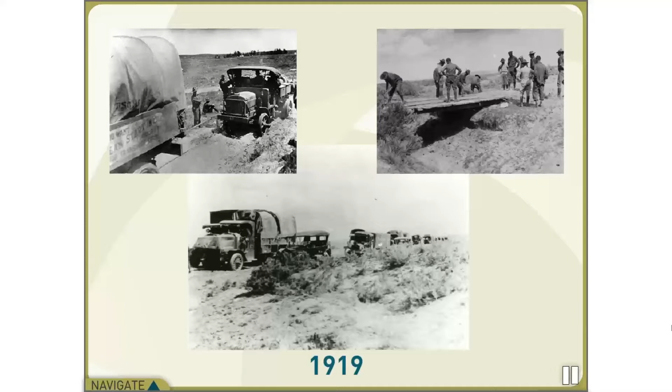It was July 7th, 1919, and a convoy of U.S. Army trucks set out from Washington, D.C. en route to Oakland, California. Their journey was arduous, to say the least. There were 230 stops due to difficult roads, accidents, and mishaps. The roads were at times non-existent, with practically all roads unpaved from Illinois to Nevada. Along the way, the convoy broke and then repaired 88 wooden bridges. Altogether, the convoy logged 3,250 miles with an average speed of 5.6 miles per hour. It was a tough journey.

One of the members of the convoy was a young officer by the name of Dwight D. Eisenhower. It was quite simply an experience he would never forget. And later, as President of the United States, he would call for the creation of a national interstate highway system. Initial construction was authorized in 1956, and the original sections were completed 35 years later.

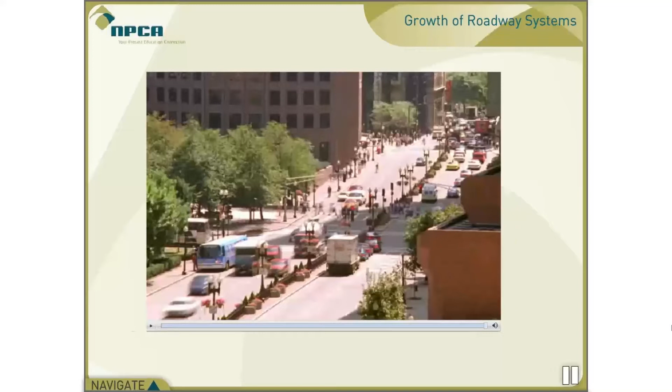At the same time, in Canada, the construction of the Trans-Canada Highway was underway, linking together for the first time all 10 provinces. In the decades that followed, the roadway systems in North America continued to grow, linking together communities far and wide. The impact of these roadways has been enormous, reducing accidents and saving lives, serving as the foundation for economic growth as goods and services are readily transported to their intended markets, improving productivity, increasing international competitiveness, bolstering national security, and enhancing quality of life.

Yet, there is a dilemma. In many cases, these roadways are aging, and the need for ongoing repair and maintenance is outpacing the funding required. In the United States, the Federal Highway Administration estimates that nearly a quarter of the nation's 600,000 bridges are structurally deficient or functionally obsolete. And repairs, when they are made, are often disruptive, slowing the shipment of goods and causing inconvenience for communities and travelers.

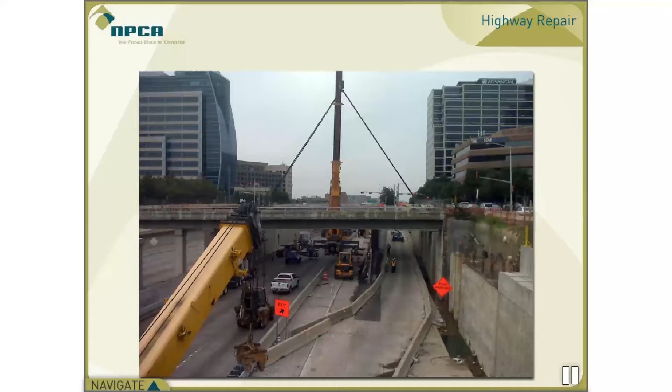These delays have real costs. According to the shipper UPS, if each of its 95,000 vehicles is delayed an average of 5 minutes a day over the course of a year, it costs the company $103 million in added fuel costs, wages, and lost productivity. Clearly, there's a need for new solutions to help keep roadways operational and productive.

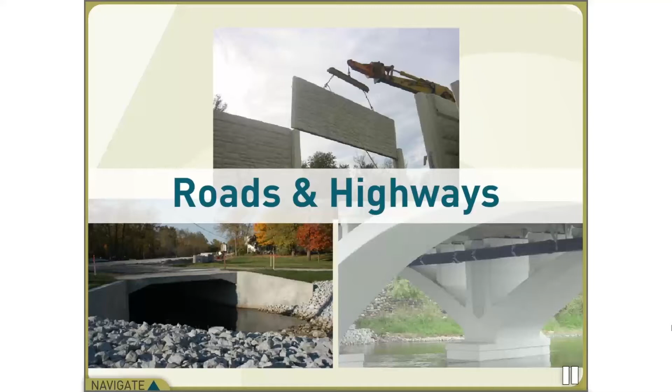Today, precast concrete products are helping provide solutions for roadway projects across North America, as well as a wide range of other transportation-related applications, such as products for pedestrian walkways and bridges, for aviation, for rail, and docks, platforms, and seawalls, and underground applications. And there are a number of reasons that precast products are chosen.

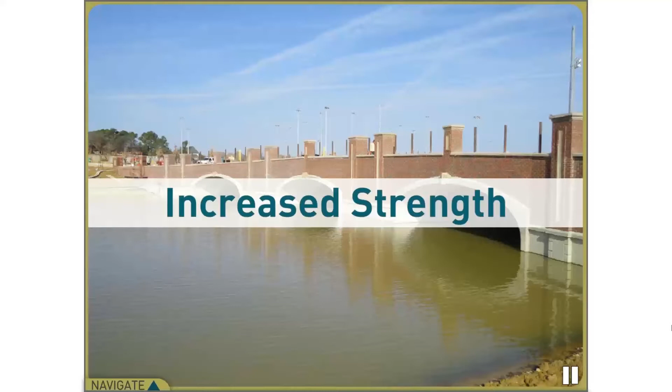Easy installation. Precast products arrive at the job site ready to install, often saving weeks over traditional cast-in-place construction. Increased strength: the strength of precast concrete increases over time. And less ongoing maintenance, often providing service life in excess of 100 years.

A wide range of products are used in road and highway construction. Let's take a look at some of the precast concrete solutions currently in use for roadway construction and maintenance.

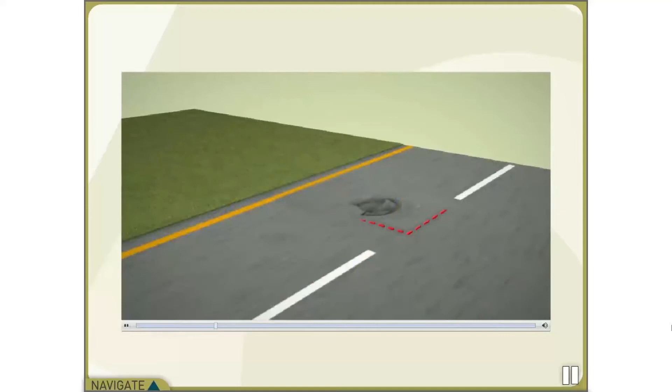Precast concrete pavement slabs can be used on highways, intersections, exit ramps, and airport pavement replacement for long-lasting, speedy surface repair or new construction. Precast concrete pavement slabs are prefabricated off-site in factory-controlled conditions and delivered to the job site fully cured and ready to be installed for immediate use.

Initially, it was difficult to go in and talk to these DOTs and say, we really need to do something about this. How we did it was we found a project that had a rapid set concrete, some type of quick setting concrete specified. And we went in and said, you know what we can do? We can do this in precast concrete. So instead of a 5-year life cycle, 7-year life cycle, we're going to give you a 40-year life cycle on your repair. And that got the attention of the DOT.

And they initially said, well, we'll try a single project and just see how it goes. And it went so well that it led to another project and another project and another project. And they're finding new uses for it now.

Precast concrete pavement has a huge potential for speeding up and reducing the risk of overnight construction and getting the freeway returned to the public without them even knowing that anything happened, except all of a sudden now the roadway is easier to drive on, and it stays that way for years.

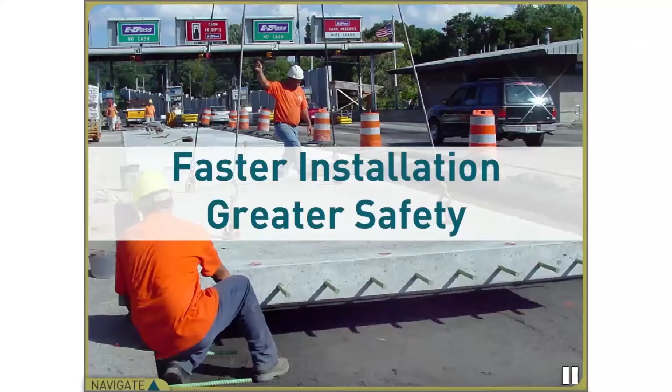Using a fully cured concrete system results in greatly accelerated construction scheduling and sequencing, reducing risk to road workers and the traveling public, all without jeopardizing the surface quality, durability, and long-term performance of the roadway. The speed and efficiency of a jointed precast pavement system is actually the primary driver in the way that we've used that.

We like to close the road for as short amount of time as possible and get it open to traffic. We want to do all of our work off peak. Precast pavement systems is really the only way that we're able to stay within the kinds of windows that we want to have and still expect some durability for the repair. So that's been the primary reason that we've done that. Precast concrete pavement systems provide long-term solutions due to precast concrete's ability to withstand heavy traffic flow over many years.

Our very first project was a pour-in-place project that we converted to precast. So we had the big orange cones along the freeway for several months, but it happened in the middle of the night. We actually had people calling our DOT and complaining because there was no work being done and all the traffic control was set up. So the DOT had to explain that, no, it's happening in the middle of the night.

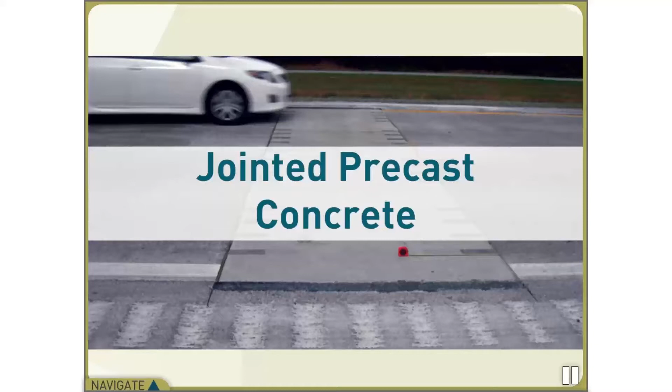Jointed precast concrete pavement is made up of individual slabs that are 16 feet or less. The vast majority of concrete pavement in existence today is jointed. Jointed precast slabs installed in an existing jointed concrete pavement structure retain the expansion and contraction characteristics of the surrounding existing pavement, making it the logical choice of repair for existing jointed pavements.

Jointed precast concrete pavement can be designed for a wide range of applications such as horizontal curves, three-dimensional surfaces, widening, changing crown lines, utility-intensive pavement, instrumented applications, and heavily skewed bridge approach slabs.

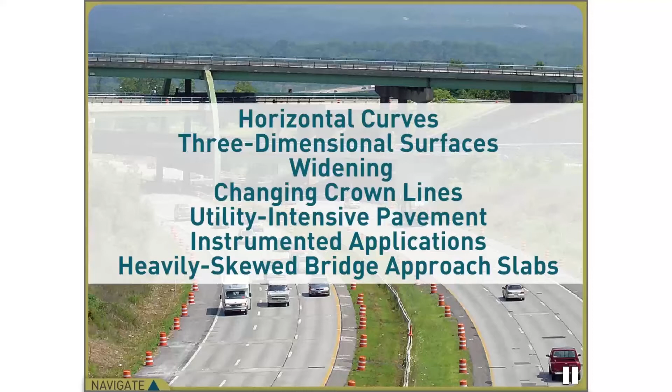Jointed slabs may be used singularly for isolated repairs or in multiples to create a continuous surface of new pavement. Computer-aided survey, forming, and grading equipment makes it possible to replace three-dimensional pavement encountered in intersections and super elevations.

So precast concrete is a superior product to cast in place because it's not weather dependent. We make the slabs in a controlled environment off-site any time of the year, and these slabs can go in January in Utah in the mountains.

Precast concrete pavement has a safety implication. The actual people who are working on the job, they have a lot less exposure to being on the highway in the middle of the night than they would in conventional construction, because a lot of that risk is taken in our yard, which is in a safer environment. We're not dodging cars, and then they go out and they do it on the job site, and it goes in really quickly. So it's a safer installation.

The advantages for motorists, I think, is the potential invisibility of the project. Our first project, I knew we had kind of met our goal of being able to mitigate the impacts when I had a couple of neighbors ask me, hey, when are you going to start that project? We've had the barrels up along the side of the road for months now, and we haven't seen anything happen. At that time, the project was nearly complete, and it was just going on at night, wasn't impacting anybody, and people wouldn't notice it during the day until you point it out, and then they could tell where the repairs were.

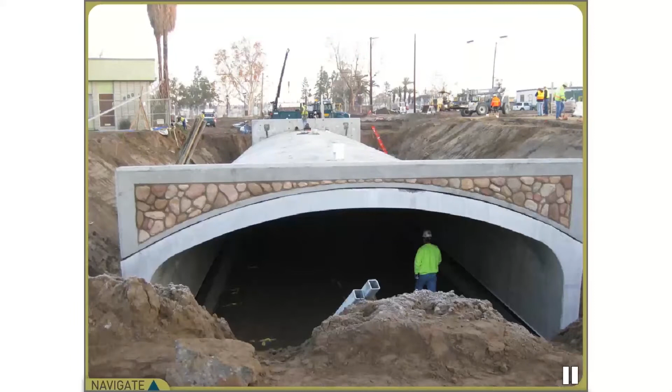Precast concrete short span bridges can provide an attractive solution for many transportation needs. Whether it's replacing an aging deficient bridge or developing new roadways. Designs include attractive single-piece arch, functional two-piece arch, and conventionally reinforced flat bridge, parapets, wing walls, head walls, and end walls. Each system has its own specification for span length, span height, and load capacity.

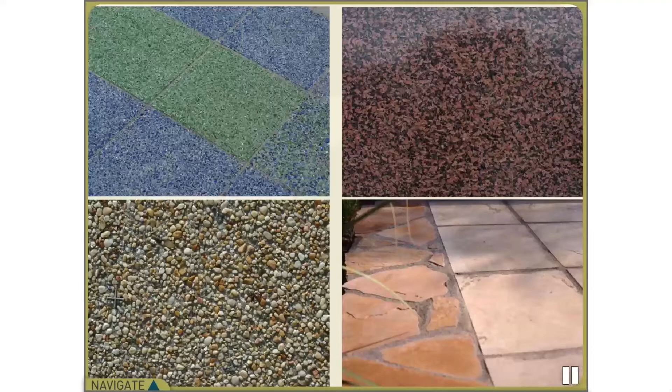Precast concrete short span bridges can also include spandrel and wing wall panels with architectural finishes. Finishes commonly available are colored smooth as cast, textured form liner, exposed aggregate, acid etch, brick, and sandblast. Each is distinctly different and provides architects and owners a broad choice in appearance to help match the surrounding environment.

Precast bridge systems, to me, are the way to go for small span bridge replacements. If you have bridges within your community that's structurally deficient or functionally obsolete, then you definitely should consider either a box culvert or a three-sided bridge, or even the arch bridges that are available in today's market.

We look at cast-in-place projects quite often. We think there's many advantages for precast in those areas. There's one project in particular where they were going to cast in place a tunnel structure. So we talked to the apparent low bidder on that structure and proposed using a box culvert with sloped end sections.

When he looked at the proposal, he said, 'I think my price is pretty close to yours. However, looking at what you offer, I can have this done much quicker.' So he went back and talked to the city, and was able to get the precast box culvert system approved. We supplied about 60 linear feet of box culvert for the structural elements, and the sloped end sections became the wing walls.

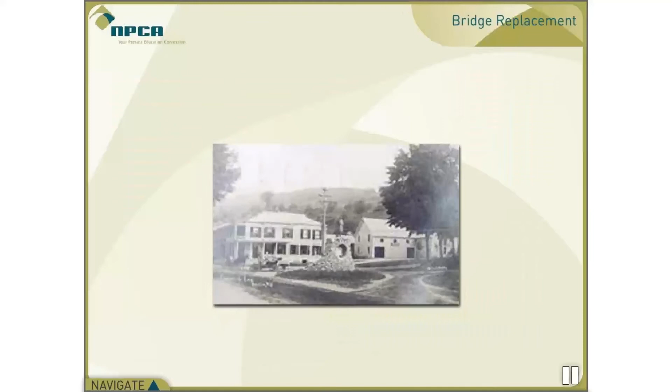St. Lawrence County selected a bridge originally constructed in 1932 for renovation with precast design. The bridge was sorely in need of replacement, with two New York State DOT inspection flags, one being a safety PIA flag. St. Lawrence County was delighted with the speed and cost effectiveness of their initial precast bridge replacement project. They estimate approximately 50% of their bridges in need of replacement can be done with precast.

We choose precast concrete products over alternative materials in general due to the immediate need. We can put it in place and not worry about cure times. It's built according to our specifications, and sizes are correct. We can just build our pads, especially for road box culverts, and put them in place. Manholes are the same—you know exactly what you're getting, with the proper opening sizes and seals and whatnot that come along with those.

Our pre-stressed box beams are a time saver for us. We don't need cure times in the field, so it's one less step when constructing bridges. We don't need to worry about 14 days of cure time on a deck where we can't get on it or open it to traffic. It really shortens our construction duration.

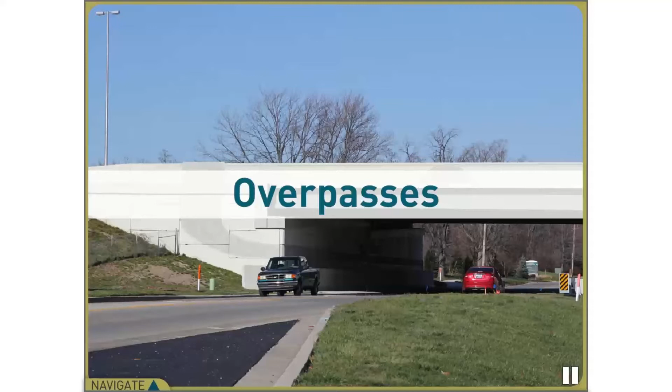When it comes to overpasses, precast concrete can span everything from gullies to gorges, including comprehensive solutions that can traverse major rivers.

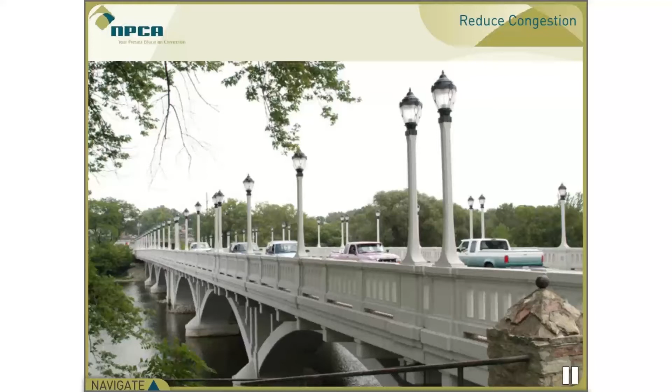Precast concrete bridge replacement systems installed during off-peak travel times are revolutionizing the way overpasses are repaired. User surveys cite congestion and traffic delays due to overpass construction as a major source of frustration for motorists. Traffic congestion also reduces highway capacity and increases the costs associated with delays for the traveling public. Precast concrete beams and approach abutments, assembled on-site when traffic volume is low, reduce traffic congestion and offer many other advantages over traditional cast-in-place construction in high-density urban areas.

We have been working with the DOT trying to get them to come up with a better finished product. We also had a meeting with all the DOT engineers about a year and a half ago, trying to encourage them—it's actually a question that I brought up.

Precast bridges—for instance, they're putting out a lot of these express design-builds, which are small bridges crossing maybe streams or single-lane highways—and we're trying to encourage them to utilize more precast to accelerate these projects, so they don't have to impact the traveling public for the long duration it takes to cast a bridge in place or excavate and remove a box culvert with traffic diverted for long periods of time. The DOT is very excited about getting more involved with precast and seeing more of the options and benefits that are really there, that they can incorporate into these express design-builds.

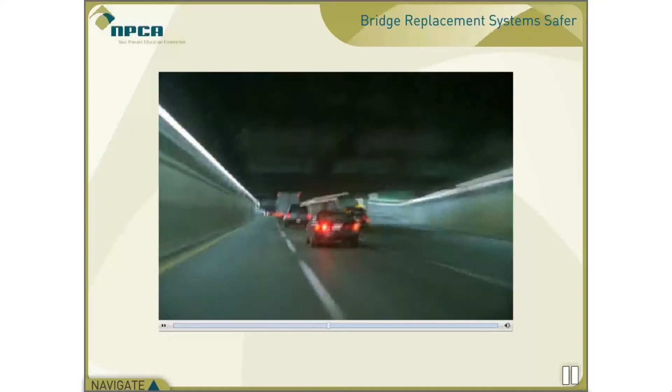Precast concrete bridge replacement systems also make the construction process safer and more efficient, because road work can be completed overnight, on weekends, and during off-peak hours, reducing the need for roadway closures.

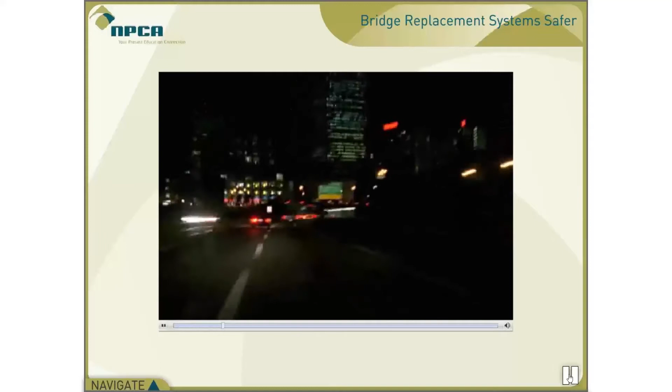Precast concrete bridge replacement systems also make the construction process safer and more efficient because road work can be completed overnight, on weekends, and during off-peak hours, reducing the need for roadway closures.

Jointed precast concrete pavement can be used as a supplement to precast concrete bridge replacement systems when reconstructing the bridge approach pavement. It will transfer loads across panels when installed. Damaged areas of pavement leading up to the bridge replacement system can be replaced with precast pavement, custom built to meet the thickness, cross slope, and layout requirements of individual project sites. Jointed precast concrete pavement can be used for single lane replacements or full width road construction.

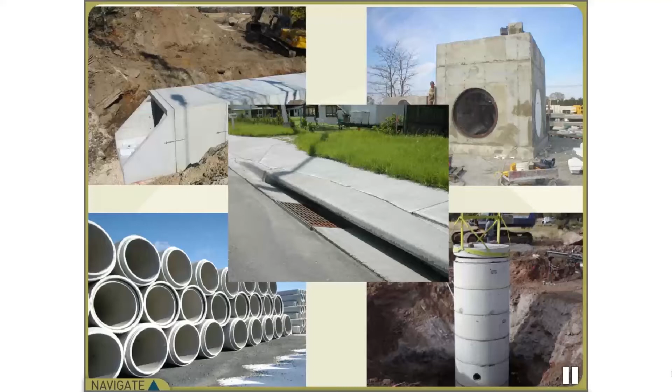Precast concrete box culverts, pipe, manholes, catch basins, and inlets are used for conveyance of stormwater. Precast concrete three-sided culverts allow for natural stream beds to remain intact while providing for short-span bridge applications. Because precast box culverts are produced in a controlled environment, they exhibit high degrees of quality and uniformity.

Box culverts are common products, and many manufacturers maintain an inventory of several sizes of box culverts ready to be delivered on short notice.

Precast concrete manholes are used for many underground applications, such as storm and sanitary sewer access, lift stations, and utilities. A properly designed and installed precast concrete manhole system provides superior watertight performance compared with competing methods and materials.

A typical precast concrete manhole can be installed 50 feet deep and more, because lateral forces act equally around the periphery, which places the section in pure compression, the ideal state for concrete.

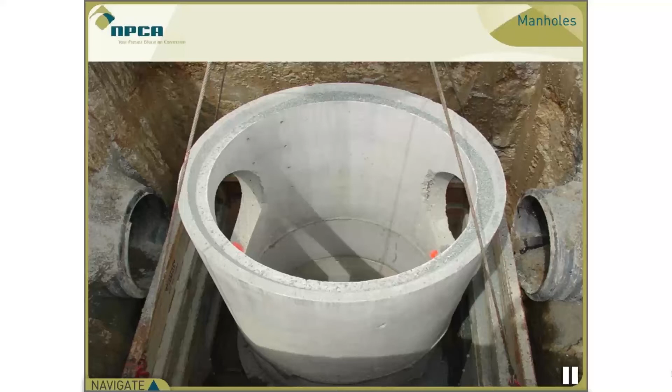Durable, impact-resistant precast concrete stormwater inlet boxes are specifically designed to carry even the heaviest inflows of stormwater away quickly and easily.

Concrete pipe is instrumental in protecting precious groundwater by conveying wastewater and stormwater through complex underground infrastructure systems. Precast pipe is available in a huge variety of shapes and sizes. The flexibility and modularity of precast pipe make it possible to meet the needs of any project.

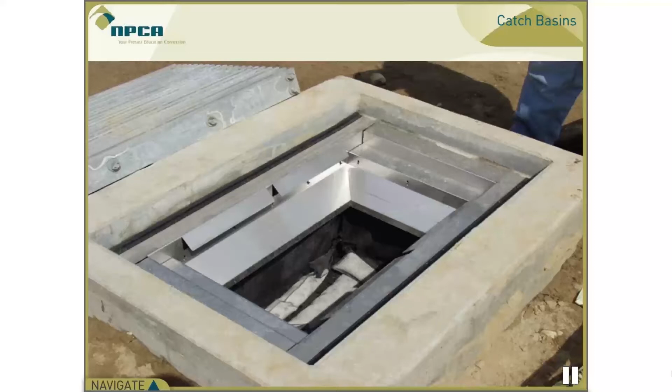Precast concrete catch basins can be customized to job requirements or used in modular components. They may be used in traffic or parkway applications with either galvanized steel or cast iron grates. Precast concrete catch basins allow contractors to drop the structure in place, make the pipe connections, and continue on with the project.

With growing traffic and expanding communities, road noise has become a real irritant for communities living along the nation's highways.

In North Carolina, they're building a turnpike, toll roads, going through subdivisions. And when they do this, the communities don't want to see the highway, and they don't want to hear it. So over the years, they've come up with sound walls and different types of sound walls. There's just the metal sound walls, which have a very short lifespan, and wood sound walls have an even shorter one.

With precast concrete sound walls, there are two types: a reflective sound wall and an absorption sound wall. Mainly we do reflective in North Carolina because North Carolina hasn't gotten to the sound absorption type. Most are reflective walls, and they're quite tall in some cases, standing alongside the highway and deflecting the sound.

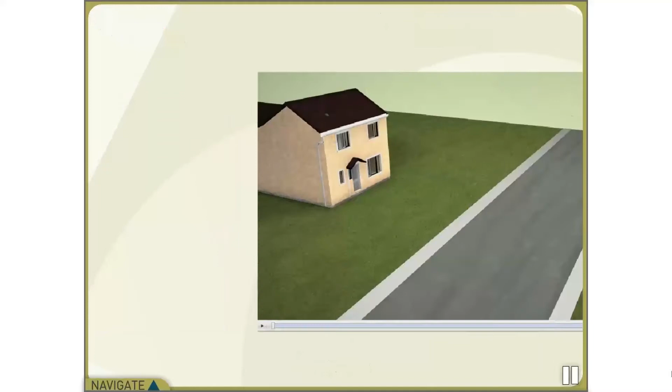Precast concrete sound walls can be designed to blend in with a city's architecture and local topography, or even to capture a community's theme or identity. Reflective sound walls can reduce the perceived noise by as much as half, while absorptive treatments have been found to further reduce noise pollution.

Whether to use a sound absorptive sound wall depends on if there are neighborhoods on each side of the highway. Typically, they don't want the sound traveling back across the highway toward the homes, which a reflective wall would do. We're seeing the use of sound absorptive walls more and more as they expand the interstate in our area, getting closer to homes on the other side.

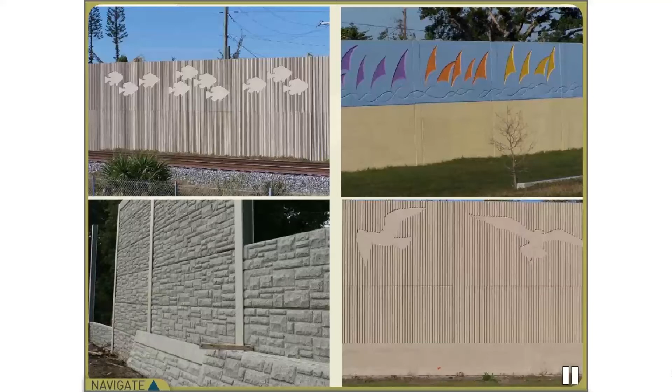With color additives or stains and textured form liners, the appearance options are nearly endless, so we can achieve pretty much any look needed. If they had an area to blend in because of a historical structure or building with a certain exterior finish, or an old stone wall, we would look to match that. There's a wide array of form liner patterns out there, and companies willing to design custom liners to fit those sites. The forms we design can take any form liner, so we can implement a new pattern very quickly.

Concrete sound walls account for nearly half of all noise reduction walls constructed in North America.

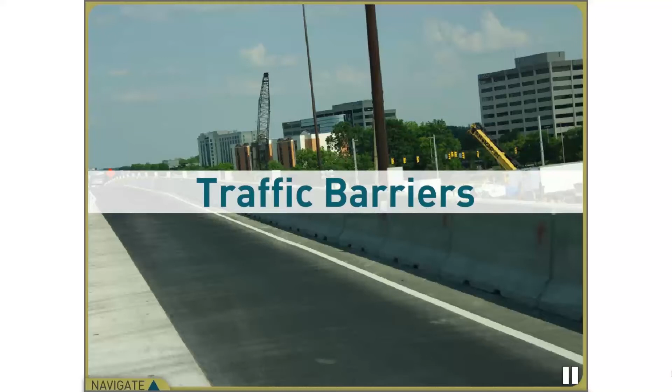Precast concrete highway barriers provide important barricades against unwanted traffic, also serving as important safety and security devices to reduce the risk of an out-of-control vehicle crossing the median and colliding with opposing traffic or roadway workers.

When installed parallel to roadways, precast concrete barriers have the unique ability to not only control traffic flow, but also reduce the speed of vehicles.

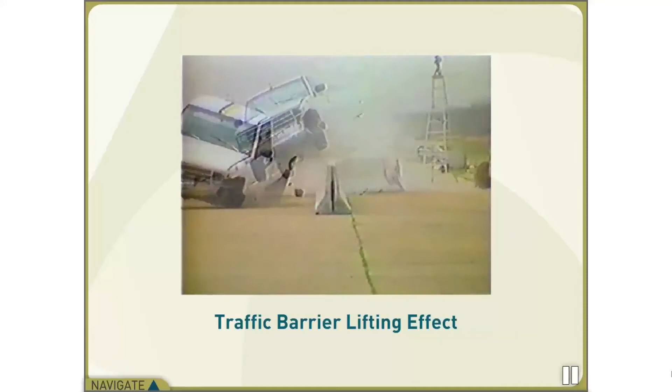They're designed for safety. Upon impact, precast concrete barriers partially lift the stray vehicle off the pavement, which decreases the lateral resistance force between tires and pavement. Once this force is minimized, the barriers can effectively realign and slow the stray vehicle. Precast barriers can be installed in permanent or temporary applications.

There are a wide variety of precast concrete earth retaining systems designed to provide a straightforward and cost-effective solution for transportation projects.

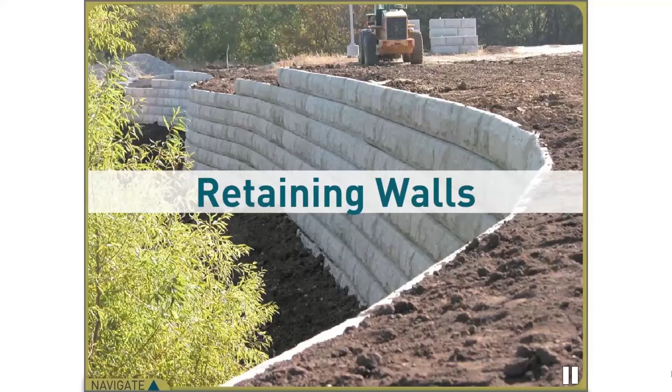Retaining walls are various different types. You have a standard MSE retaining wall, which has reinforcing straps or tiebacks, or you have a gravity wall style retaining wall, which is based on just volume and weight with no tiebacks, but they have limitations on how high they can go.

Issues with wall height, right-of-way, seismic activity, and drainage can all be overcome by specifying the use of a precast concrete earth retaining system.

When it comes to economizing a job with precast over different products, one of the big things is time on the site. With any precast product, we can have the job sitting in our yard waiting on the project, versus if you're on site working, you have to do it as you go.

So for many products, it's very good to do them out of precast. With retaining walls in particular, the bigger the block, the faster it goes in. If you're comparing small block versus big block, you're going to set six small keystones by hand, or swing a track hoe one time. When you've got a very big wall, the time savings and labor is huge. And in this day of accidents and L&I claims, the less labor you have on the site, the better, and the less they're having to lift and move, the better.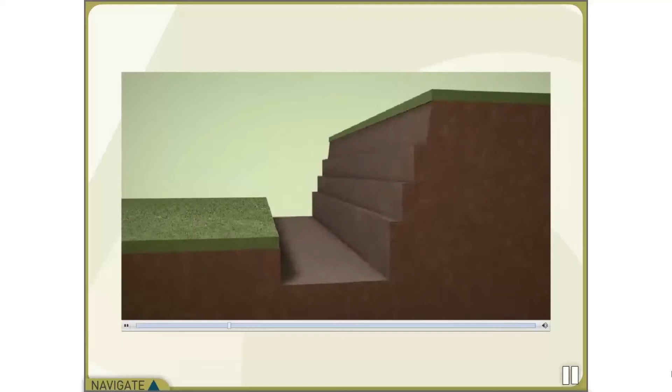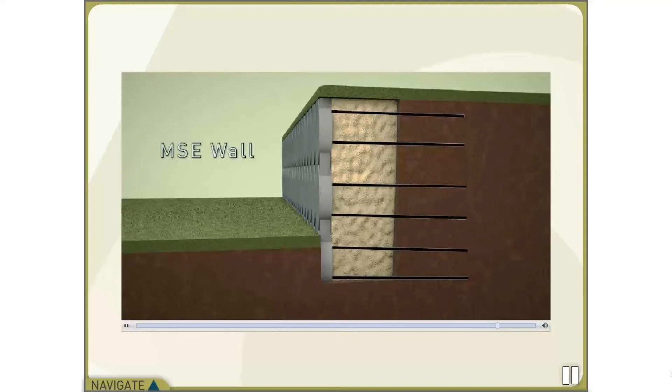Mechanically stabilized earth walls are built from individual panel sections. These systems have interlocking panels and are supported by steel straps that are mechanically attached to the back of the panel and extend back into the retained soil, resulting in a reinforcing zone behind the wall. The reinforced soil mass, along with the facing, acts as an improved gravity wall.

Large precast modular blocks. The site is prepared by excavating and adding a crushed stone leveling pad and drainage pipe. The first block is then installed on top of the crushed stone, and the area behind the block is backfilled. The process is repeated until the specified height is reached.

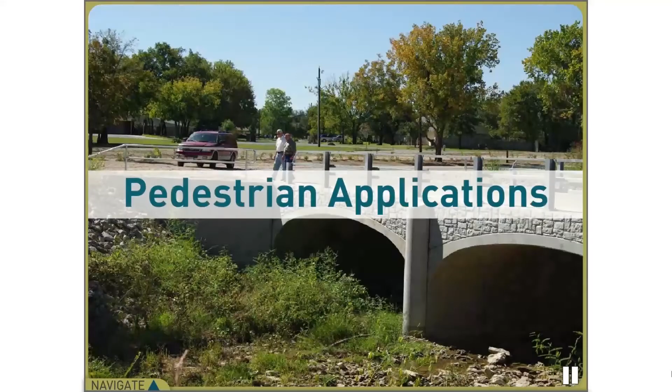Precast concrete products used in road construction are also widely used for pedestrian applications. Short span bridges, box culverts, retaining walls, and sound walls are all frequently incorporated into walking and biking trails.

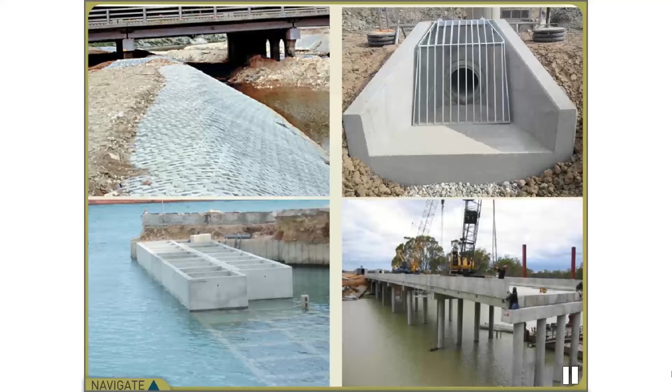Precast concrete products also play an important role in marine transportation. Floating docks, underwater infrastructure, decking, and railings are among the uses of precast along the waterfront. Precast products can counteract the buoyant forces of water significantly better than most materials, and corrosion inhibitors can be added to the design to ensure a long service life. Products include bulkheads, marine boat launch ramps, marine pilings, pontoons, breakwater elements, and a host of others.

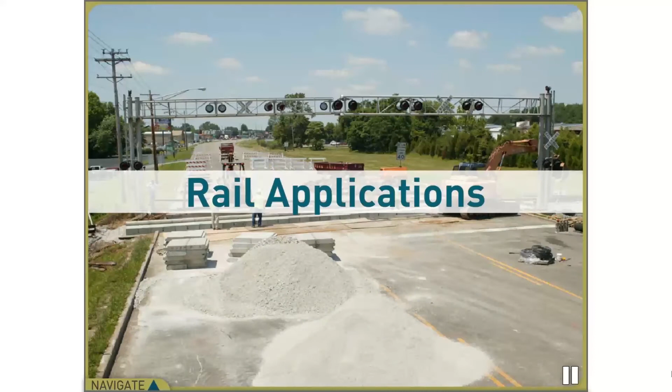Precast concrete products also provide optimal solutions for many rail applications, including precast products designed specifically to minimize downtime with quick installation for railroad crossings, and highly durable and resistant precast railroad ties that minimize disposal and environmental hazards associated with traditional ties.

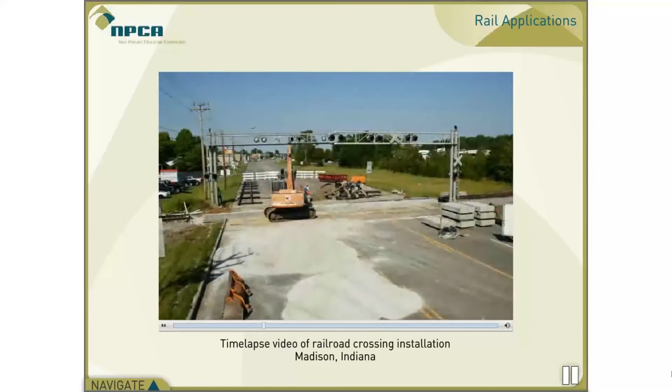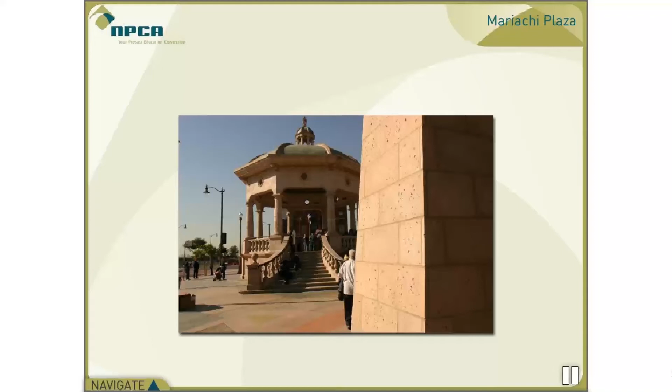Mariachi Plaza in East Los Angeles uses precast panels to replicate Mexican cantera stone and create a striking plaza for the California rail system. The centerpiece of the plaza is a gazebo created with Mexican cantera stone that had been donated by the city of Guadalajara 30 years earlier. In the renovation of the plaza, precast panels that closely approximate the color, texture, and shape of the donated cantera stone were created to complete the plaza.

The Mariachi Plaza is in East LA, and it's a big part of the civic identity out there. It's a cultural hub, a gathering place, and central to that hub is a cantera stone gazebo that was donated by the city of Guadalajara about 30 years ago. When they decided to build the subway station in the same plaza, they wanted the canopies that protected the escalators down to the subway platform to blend in seamlessly with the existing gazebo.

It was probably impossible to source cantera stone from the same quarry. Even if you're able to source cantera stone from that quarry, you're looking at material that's 30 years down the line, not to mention the gazebo itself has been weathered and has been developing a patina over the last 30 years as well. So whatever you pulled out would probably not match, even if you could find it.

So what we did is we worked with the architect and the GC to create a custom panel made out of precast concrete, and we were able to match the color and the texture. We put colored aggregate at the surface to replicate the unique nature of the cantera stone. So using a form liner and different production techniques, we're able to create a custom panel that's lightweight, durable, and is going to match the existing gazebo.

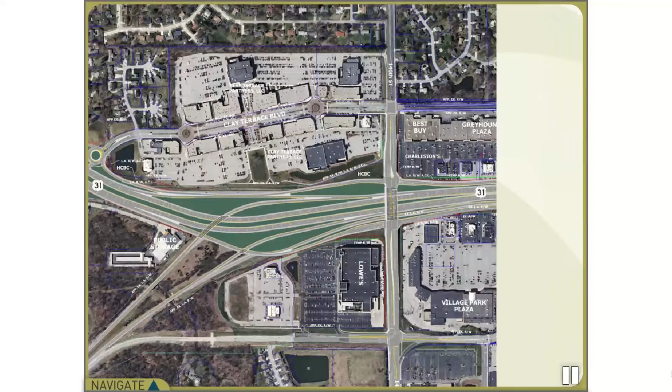This project, because it's in Hamilton County, one of the fastest growing counties in the nation, and Carmel and Westfield are among the fastest growing cities in the nation as well, had to be built quickly. At the same time, these are currently all signalized intersections, so the mayors of both Carmel and Westfield saw that those signals had to be removed, not only for safety reasons, but also because development has been sitting there anxiously waiting to develop these interchange areas. Until the interchanges moved in, the development wasn't happening.

So the cities worked with INDOT to help make this project happen. And now all the developers are starting to see the project happening, and they're starting to make their moves to create jobs for the city of Carmel and Westfield.

From the onset, one of the challenges facing the project was the difficulties surrounding land acquisition to facilitate the roadway expansion. Precast concrete structures help designers minimize the project's land requirements.

Precast structures have been critical to this project just because the land acquisition cost has also been huge, millions and millions of dollars. The acreage here in this area is about $1 million an acre. So it kind of tells you that you really can't buy a lot of land.

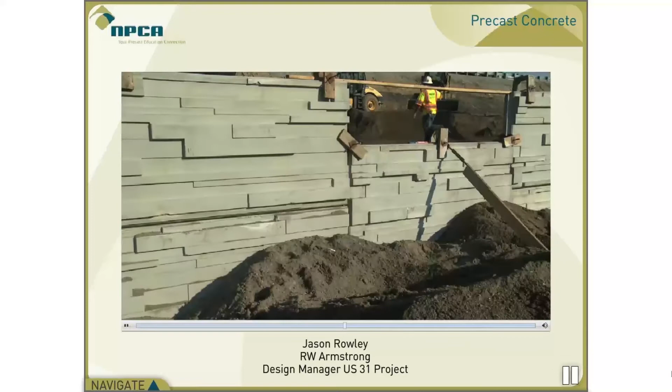So that's where we look to precast concrete, the retaining walls, the three-sided type of structures, to help us out and save money for INDOT. It allowed us to take less land, acquire less land, and then help out so more businesses can remain and the tax base can remain for the cities of Carmel and Westfield.

The US 31 project makes extensive use of mechanically stabilized earth, MSE, walls. These walls are constructed of a specially designed precast panel facing and granular soils reinforced with linear reinforcement.

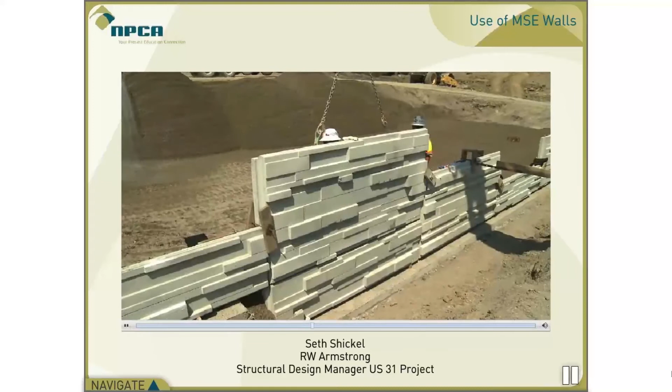Mechanically stabilized earth, or MSE walls, are really a block of dirt with a concrete panel on the face. The concrete panel is the precast piece. You can see those behind me, and we have aesthetic treatments on these - some are smooth, some have color, some have form liners on them. The part that's structural is behind that. It's a steel strap that sticks into the ground.

Dirt is placed on top of those straps, and the friction between the strap and the dirt holds that block of dirt in place. Again, the concrete panels are the facing material, not the structural part. But without that part, dirt spills out and you don't have a road.

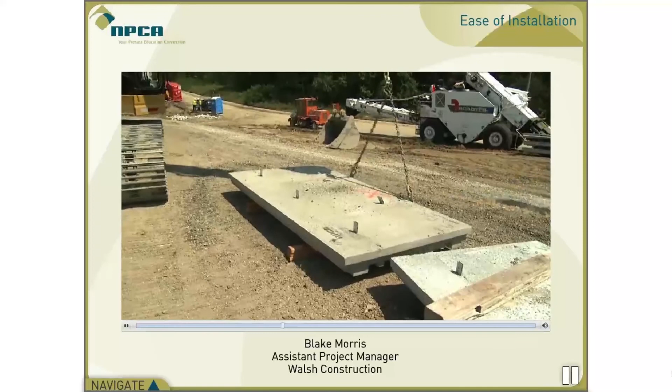The installation of the precast MSE wall panels is fairly easy. The panels get shipped out here on a truck, and we unload them with a loader. Then they're all numbered to follow the sequence on the shop drawings. The guys go over, find the number, pick it up with two hooks that are cast into the top of the concrete panel. They bring it over, set it on the wall, clamp it off to another panel or to the ground, whichever one will support the panel, and then they backfill with sand or any kind of suitable material.

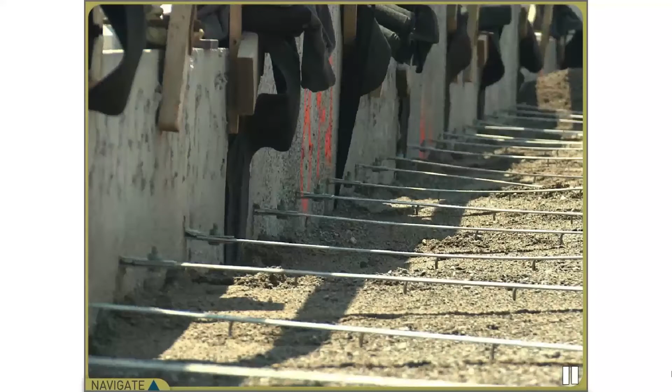While installing the straps, once they get to the top strap, they can release the clamps, and that wall is stabilized by the retaining straps. Special care was taken to ensure that the MSE walls fit well within the surrounding communities.

The project also had a lot of visual aesthetics. City of Carmel, City of Westfield, very prominent areas in the north of Indianapolis, so aesthetics was key to this project. We put a lot of aesthetic treatments on these precast structures, the MSE walls. We tried to mimic natural limestone, trying to make it fit. They call that context-sensitive solutions. It's a big thing with INDOT. It was a commitment on the project to make the aesthetics of the whole project fit with the surrounding environment.

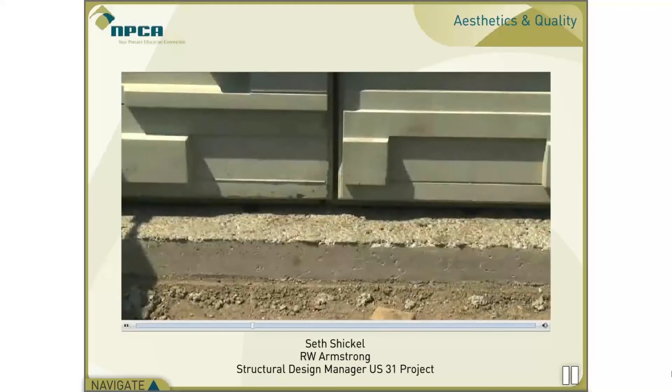On this project, specifically the MSE walls, our landscape architect, Green 3, developed a kind of stacked stone look. It's supposed to mimic closely a limestone, which is pretty prominent here in Indiana. And so it's all concrete, but it kind of looks like limestone. We worked pretty close with the precasters prior to the first construction project to make sure something like this is possible. We've got pretty deep reveals on some of these walls, and that takes pretty particular care in the production process. So we wanted to make sure we weren't overstepping our bounds with what we thought would look good, what we knew would look good.

During the first construction project, the precasters provided example panels, test panels, and those test panels look just like the ones you see behind me. It's worked out well. The lines are crisp. There's several different kinds of panels, and we see the same quality product on each one of them.

Having the precast concrete, it really blended well, as you can see in the background. It looks good, but you put a little more landscaping in front, it's going to blend really well with the whole surroundings of the area. So trees, shrubs, and having the precast structures took less right of way, so it gave us more room to put some plantings in there, which made the locals and all the businesses and the mayors very happy.

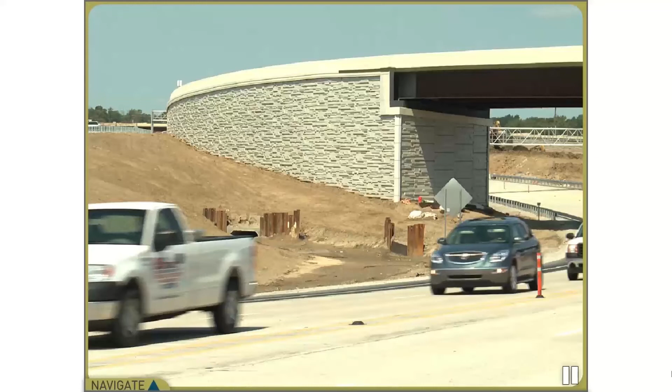In addition to the MSE walls, precast concrete products played a vital role in the construction of many of the project's overpasses. The US 31 project has over 50 bridges. There are several new interchanges being built, and every interchange has at least one bridge. There are several water crossings also.

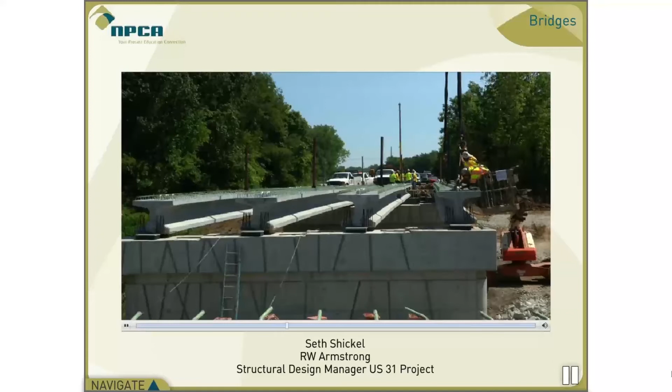All but 9 of the structures on the project will be using concrete. Most of those are beam type structures, precast concrete beams. Most of them are bulb tees, some I-beams also. We have a new shape that we've worked with. Several design consultants have worked with precasters to develop more efficient concrete beam shapes, and we're utilizing those as much as possible on this project.

The coordination with precasters is key on this project to determine what beams are available and what lengths. We have beams as short as 50 feet and as long as 150 feet. So to get those delivered to the project site - it's a pretty good project site, we're pretty well in the middle of the state, there's good access - but we still coordinate with the precasters to make sure each of those beams are available.

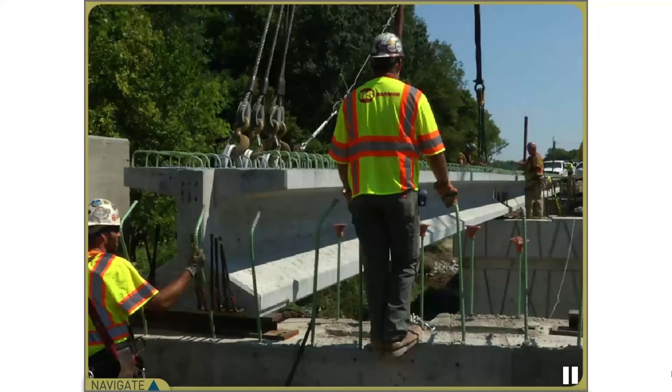The beams for each bridge were manufactured to exacting specifications. Tolerances on the precast concrete beams is pretty specific. Obviously, we build the pier stems and the abutments prior to those coming, so they have to hit right where our bearings are on those within an inch.

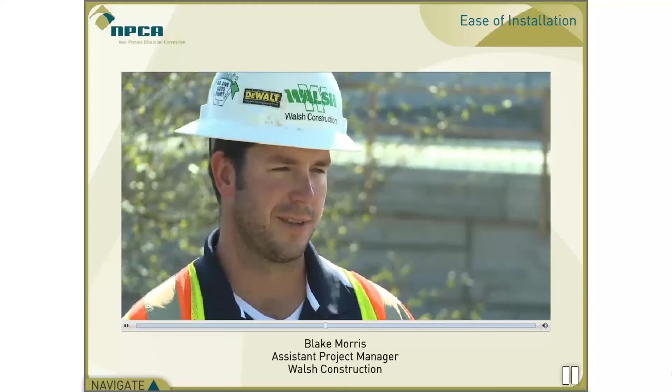Precast did help on this project reaching our deadlines. The project is a 1-year job, $35 million. We had 2 ramp closures, one specifying 90-day maximum closure, the other one 80-day maximum closure. If we didn't have precast products like the MSE walls, the concrete bridge beams - if we had to wait for cure time, the rebar guides, the formwork, things like that - we would have never made those deadlines. And we did beat - we're under one deadline now - we beat the 90-day deadline by 7 days.

The US 31 project also required a variety of precast drainage structures. The underground drainage structures and products on this are all reinforced concrete precast, either pipe or drainage structures, box culverts. Typically, with using the reinforced concrete pipe, once we dig it out, we can lay the pipe in there and backfill. It's a more rapid backfill, allows us to get through it quicker versus a plastic pipe or something like that, where you have to pay a lot of strict attention to the backfill and make sure it's not compressing the pipe.

The box culverts all slide together. They're a bell and spigot design, so you lay them just like a reinforced concrete pipe. You lube the ends and stick them together. And we tend to open cut everything and just throw them in one by one, just take them off the truck and put them right in. So there's nothing after that - we wrap the joints and then backfill them.

As far as the drainage structures, they're all precast units. They come in about 4 foot tall. We've got drainage structures out here that are 30 foot tall, so they'll come in 4 foot segments, and then we'll stack them up as our fill goes up. We'll just keep stacking the pipe out.

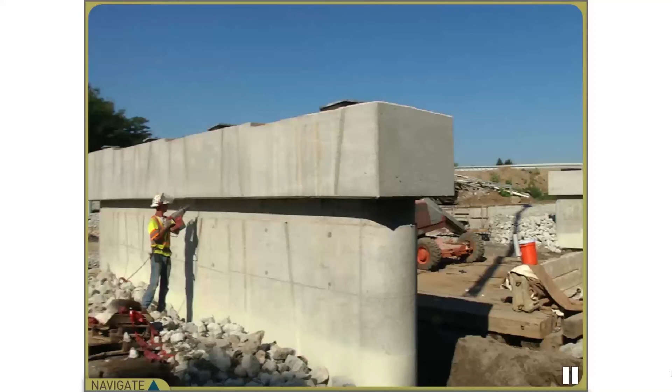Altogether, precast concrete products help designers and contractors meet the demanding challenges of the US 31 project.

The major advantages of these precast concrete products are cure time and forming. With cast-in-place, you use a lot more crew hours and equipment to set forms, rebar subs, and things like that. With precast, you can make the product off-site and have it shipped in and set right away, versus having to build it and wait for things there. They can build everything off-site, bring it in, and set it in one fell swoop. So I think time, cost, and overruns on concrete, especially with box culverts, beams, and things like that, the overrun on concrete the contractor pays for.

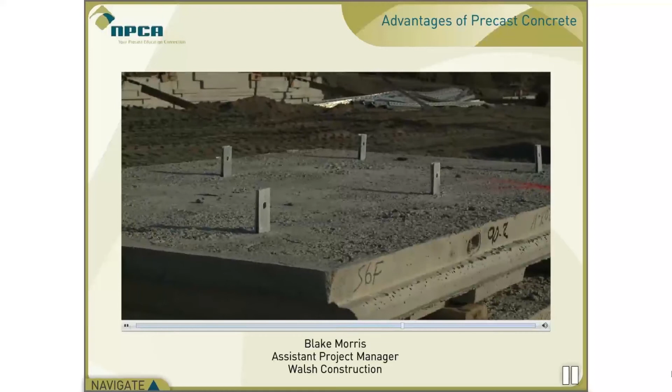Precast concrete helps in the storage and maintenance of the project because our precast suppliers make it at their shop. They can make the 233,000 square feet of MSE wall and ship it out to us as we need it. We can keep our areas clean and free. We're working in a real constricted area on this project, so if we had to build it with all the formwork and rebar it would take to build all these walls and bridges, we just wouldn't have the room to work.

Overall, the quality of the precast concrete products used in this project specifically, we've been very pleased with it. They go in, they fit, everything fits where it needs to be. The critical specs that they needed to meet all meet. We haven't really had any problems.

Precast concrete is an inherently sustainable construction material. On the US 31 project, and INDOT projects in general, there's not a requirement to meet any certain sustainability requirements. But through the use of precast structures, retaining walls, and smaller three-sided structures instead of larger bridge crossings, we can attain a level of environmental sensitivity that can be considered sustainable use on public use projects.

This project had a lot of new, innovative ideas that we've used. Thanks to the precast industry, they helped us open our eyes and see what's actually out there. The old technology of building a catch basin or precast structure by hand really isn't used as much anymore. Now you order the precast structure and have it delivered to the site. Contractors like it, the owners like it, and the cities and taxpayers seem to like it too.

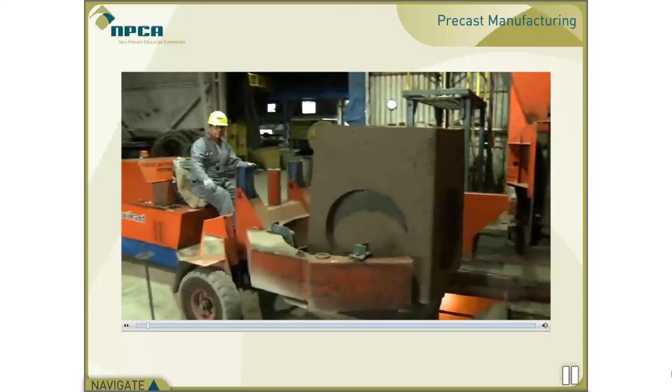Modern technology enables us to move concrete production from the field to a plant environment and greatly enhance quality control. Precast structures are manufactured in a controlled environment that enables careful control. Let's take a look at the typical manufacturing process.

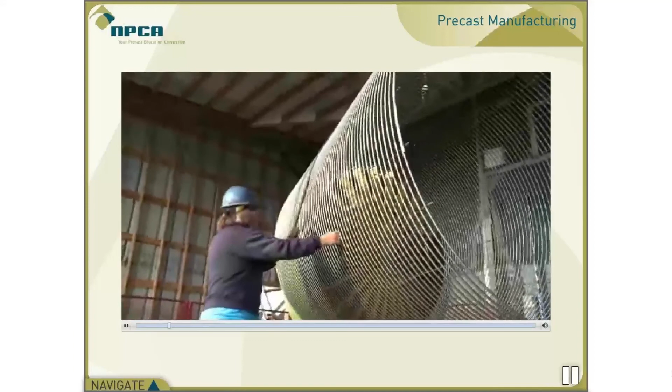The production cycle begins with the initial setup of the forms prior to casting. If the product requires reinforcing steel, there are numerous ways to stage, set, and place the reinforcement. Reinforcement cages for the structure are typically assembled in a separate area using specifically designed machinery, or pieced together by plant personnel. Machinery used to fabricate cages is able to cut and weld reinforcement wire to form the assembly required for the structure.

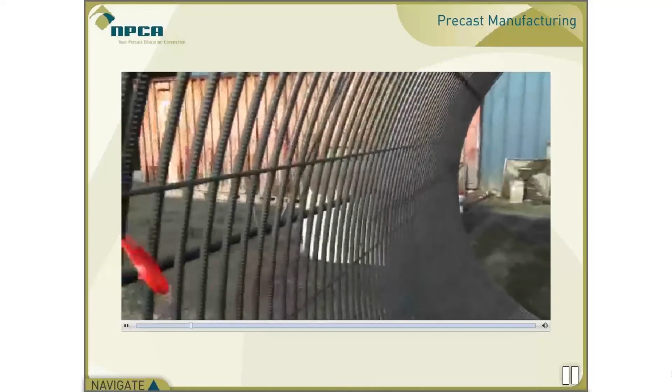Cages that are pieced together by hand are also an effective way to accurately position and stage reinforcement in the form prior to casting. Additional support for the structure can be provided by additional reinforcing steel, which is secured to the support structure according to the design drawings. This will further enhance the finished product's ability to withstand stresses in the field.

Next, the reinforcing assembly is put in place according to the engineered detailed drawings. These reinforcing assemblies are made to exacting standards and must be carefully placed to maximize efficiency while providing enough concrete cover to protect it from the elements and to provide adequate bond. In the design process for the structure, engineers consider all loading conditions, including handling, shipping, installation, and service loads.

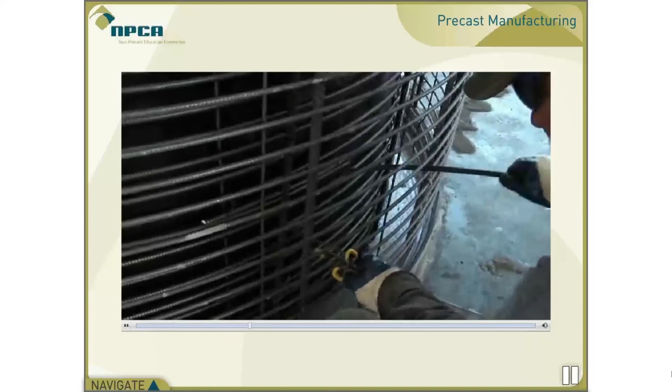Chairs, spacers, and other concrete accessories are used to keep the reinforcing structures in the correct position and prevent any shifting while the concrete is poured. A quality control technician carefully inspects the structure prior to closing the form, in many cases ensuring that proper clearances for reinforcing steel are maintained and any embedded items or knockouts are accurately positioned. This quality control check is referred to as the pre-pour inspection, and is one of many quality control procedures performed throughout the manufacturing process.

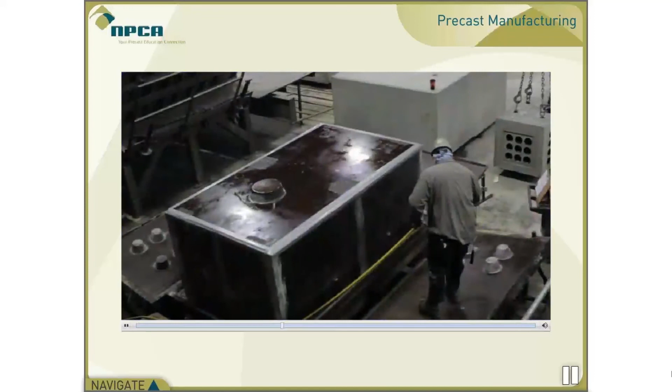The inner jackets and cores of the forms are typically coated with a form release agent, and then the cage assembly and/or reinforcing steel is placed in the form, paying close attention to avoid reinforcing steel touching coated surfaces. The batch plant operator would then start up the mixer to begin the batching process.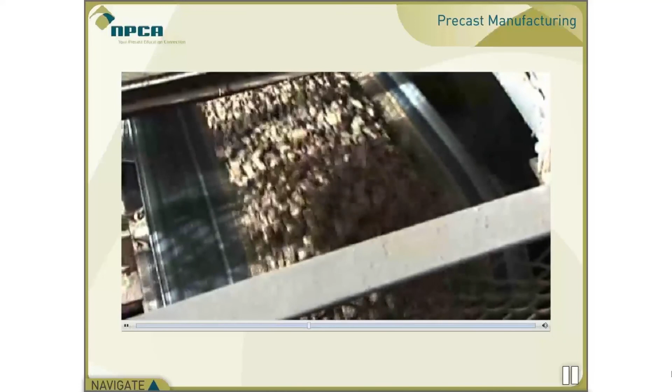Typically, batch plants are automated and able to measure and dispense specific amounts of raw materials according to the designated mix designs. Once the batch of concrete has been mixed, it is placed into a bucket or other transport device, and the fresh concrete is transported to the form.

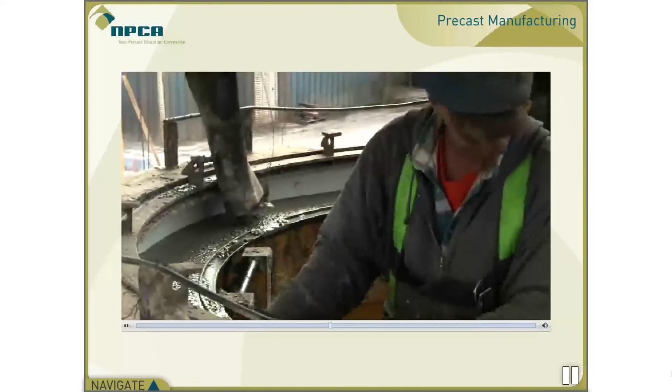The concrete is carefully deposited to avoid segregation and is consolidated into place with vibratory equipment, unless SCC concrete is used. For conventional concrete, consolidation is a critical step in the process, as it is used to drive out entrapped air, which, if not removed, may increase porosity and decrease the strength of the concrete.

Concrete testing is generally performed after the first batch of concrete is mixed, and throughout the batching process to ensure a uniform mix that meets the design requirements.

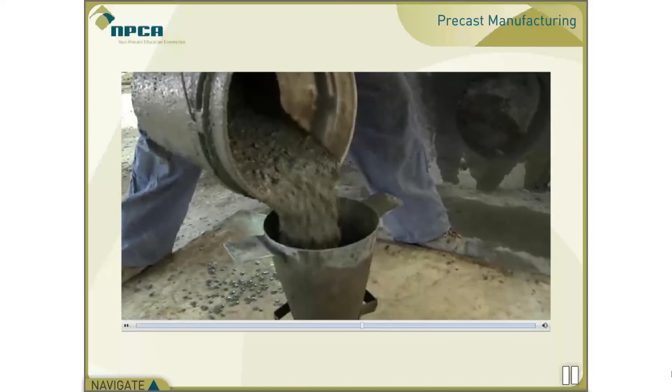One of the plastic concrete tests performed is a spread test. Spread tests are performed when using self-consolidating concrete, also known as SCC. Once the concrete has been placed in one lift in the inverted cone, the cone is lifted. The technician will then measure the distance or spread of the concrete at two points perpendicular to each other, which gives an indication of proper viscosity and flowability.

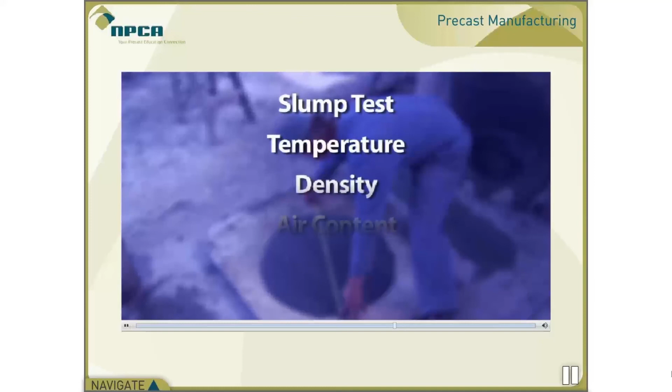Conventional concrete has a similar test called a slump test. Other tests include temperature, unit weight or density, air content, and compressive strength specimen casting.

After compressive strength cylinders have been cast, the specimens are placed in curing conditions similar to that of the product, so accurate measures of the next day, 7 and 28-day strength of the concrete can be taken. Concrete specimens can be tested at any day the project requires.

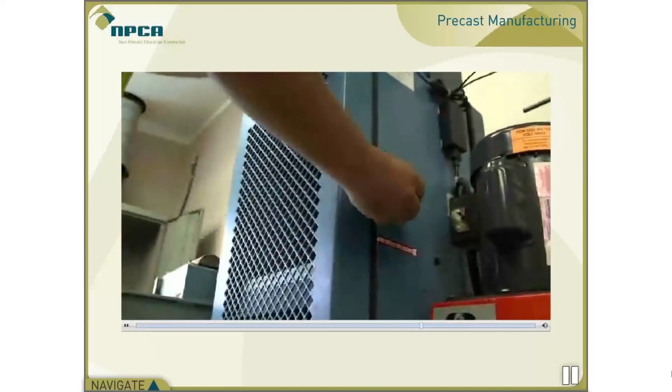Some cylinders are even placed in a water bath to provide 100% moisture for quality control laboratory testing. These cylinders will later be tested to measure the compressive strength of the concrete. Next day compressive strength tests are required to develop and define stripping strength of the concrete mix design.

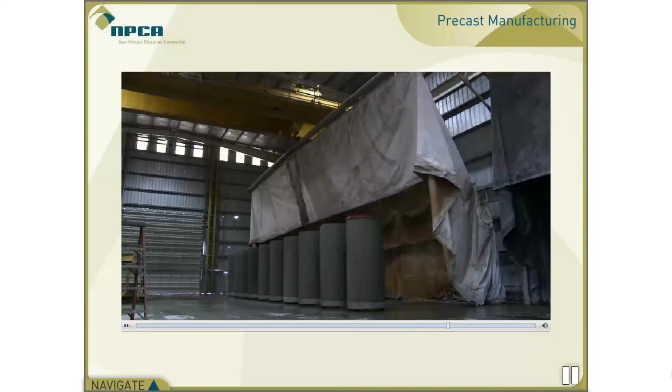After the concrete has been completely deposited in the forms, the concrete begins to cure or gain strength. As the concrete cures, curing enclosures are sometimes used to help provide adequate moisture and temperature. Proper curing is essential in ensuring that the cement fully hydrates, maximizing the hardened concrete's characteristics.

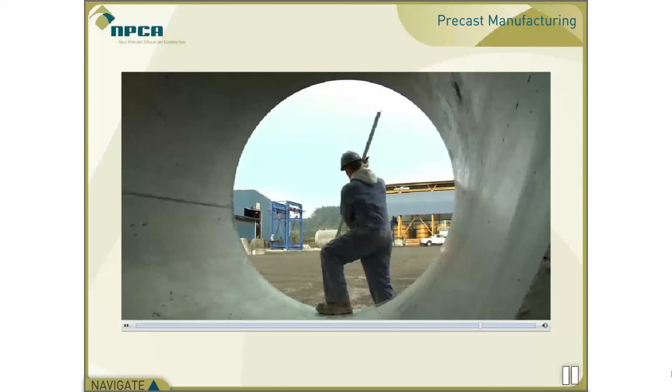Once minimum stripping strength is achieved, the products are stripped from the forms. After the concrete has met the next day minimum compressive strength, the product is stripped from the form and then inspected. Products are inspected by the quality control technician to ensure they meet specifications and design drawings.

After the quality control technician approves the product, it is marked, labeled, and moved to the storage area. This post-pour inspection is an important element of any precast plant's quality control program. Any product out of tolerance is marked accordingly and repaired.

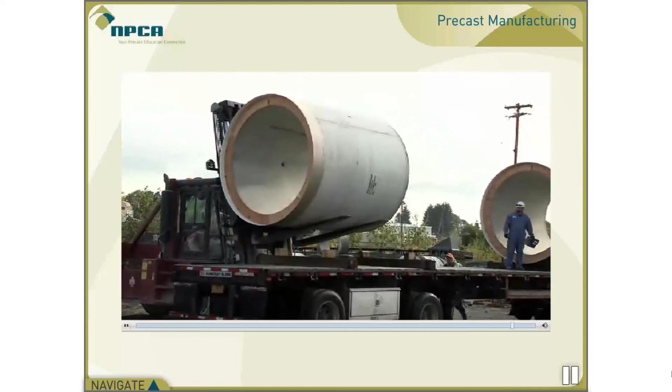When it's time for delivery, products are loaded onto trucks and securely fastened to the bed. A quality control technician will then perform a final inspection to ensure that the proper products are being shipped, the products are properly loaded and secured to the truck, and that no damage has occurred during handling. The precast concrete products are then delivered to the job site for a speedy installation.

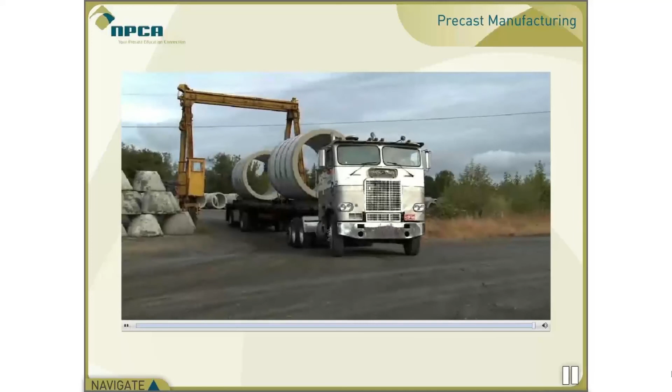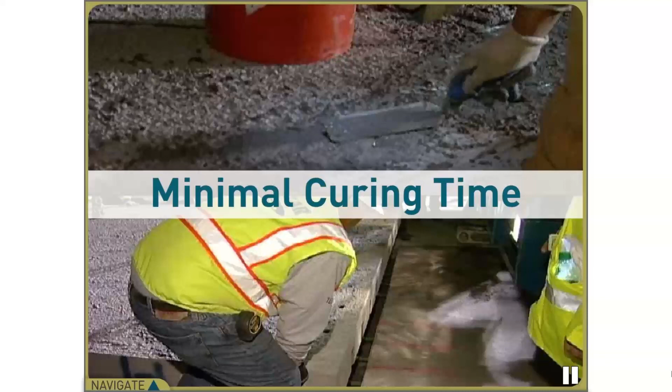For projects where heavy traffic limits the curing time, precast concrete solutions can play an important role. For example, precast pavement slabs require minimal, if any, additional on-site curing time since they are cast off-site, fully cured, and ready for use upon arrival. Plus, the durability of precast pavement is enhanced because it is fabricated in a controlled plant environment, free from adverse temperature and weather-related conditions.

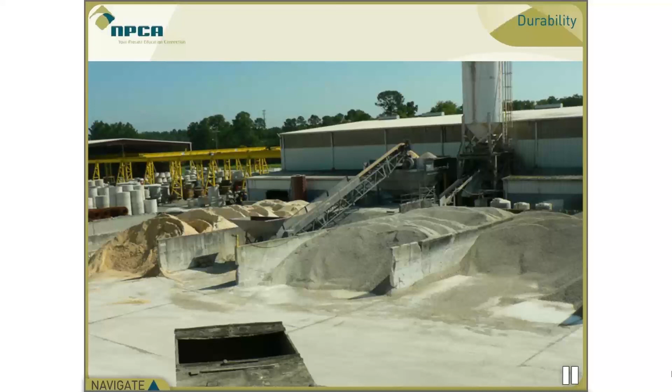Precast concrete manufacturing plants stock a wide selection of admixtures and aggregates that may be used to optimize pavement life. The strength of precast concrete gradually increases over time and does not deteriorate when exposed to harsh environments, as some other materials do. Studies have shown that precast concrete products can provide a service life in excess of 100 years.

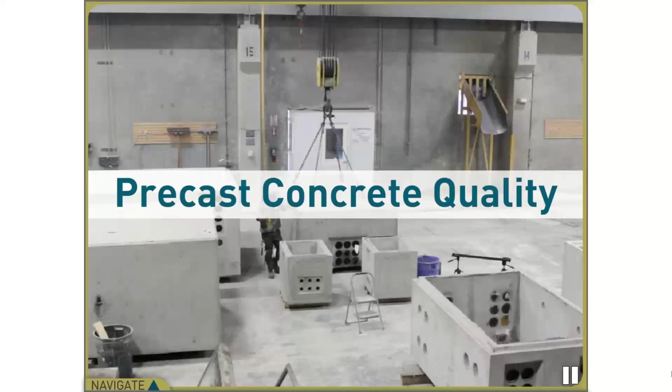Because precast concrete products are made in a controlled plant environment with advanced quality control processes, they exhibit high quality and uniformity. Problems affecting quality typically found on a job site—temperature, humidity, craftsmanship, and material quality—are nearly eliminated in a plant environment. And precast concrete minimizes problems associated with job site curing and shrinkage problems associated with conventional cast-in-place techniques.

Plus, precast concrete can be placed in weather that is not conducive to cast-in-place construction, such as rainy, hot, or cold weather, since precast products are fully cured before they are delivered to the job site. This helps to extend work seasons in climates that may ordinarily restrict construction of conventional cast-in-place concrete projects.

Precast concrete is non-toxic, environmentally safe, and made from all natural materials, making it an ideal material for use near natural waterways.